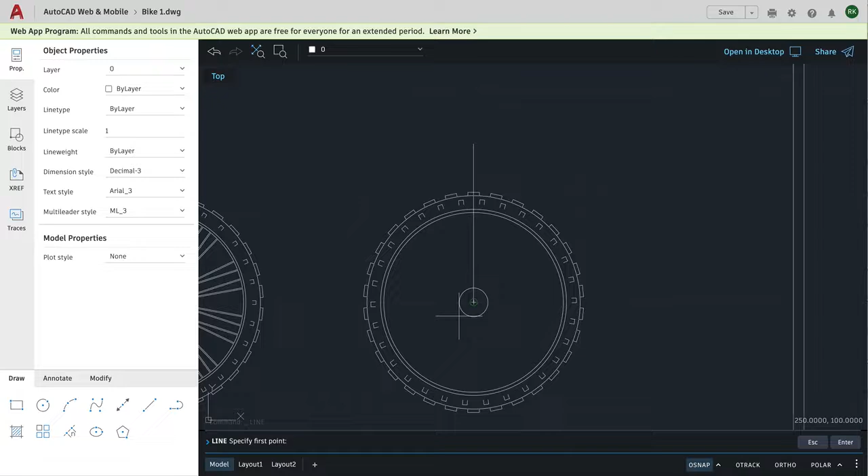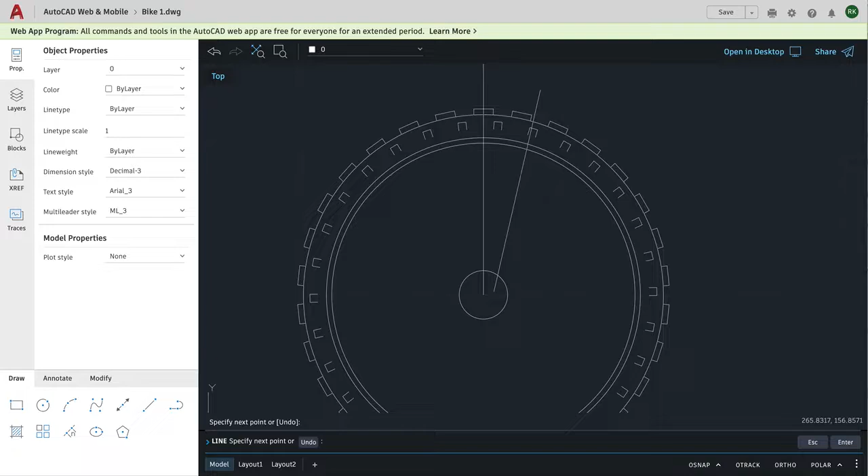So we're going to go down to our line tool, and I'm going to zoom in just a little bit. I'm going to draw one line, turn my object snap off. I'll draw a line from roughly here in the center up towards the top of the wheel on a bit of an angle. It doesn't really matter what angle you choose, maybe somewhere around there would work fine. So I'll draw my line right there and hit return to end that line.

I'm going to create another line that needs to be vertical, so I'll copy or offset this line that's already there. I'll choose Modify and Offset. It asks me what distance I want to offset through. I'll choose a distance of 2, return, then select my object and click on the right side. All right, so I now have those two lines created.

Now what I'm going to do is offset these lines and then mirror them to the other side so we have an exact mirror image. So I'll offset through a distance of 0.5, click on the line and offset to the left, and then offset again at the same distance, 0.5, select my object and offset this one to the right.

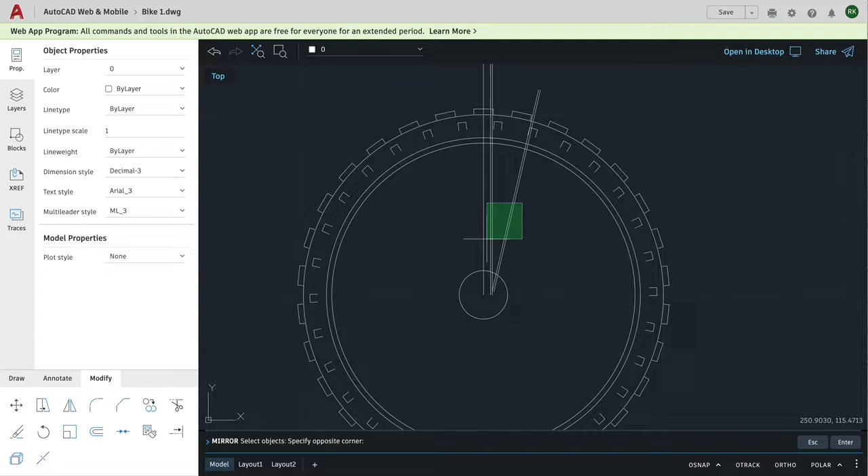Okay, so I have those two objects now. What I want to do with these is flip them over so I have a mirror copy on the other side. The tool that allows me to do that is called the mirror tool. So I select the mirror tool, and I want to select those 4 objects. I'm simply going to click and drag around so I'm covering the 4 of them, then hit return.

It says specify the first point of the mirror line. For this part, I need to turn my object snap back on. I'm going to click on the end of this line right in the center, and go all the way up to the top and click anywhere on that line that's exactly on it - any one of those intersection points would work just fine. So I click on that point and then hit return. That's going to give me, as you can see, a duplicate of those lines. So I now have that V pattern on both sides.

Now I'll zoom in a little bit more here so we can see this in more detail. I'm going to start to trim, so I'll turn my object snap off for the trim. I click on trim, hit enter on my keyboard, and I now simply click on all of the parts of these lines below that edge of the little circle. So I'm going to get rid of all of these - just keep clicking until they all disappear.

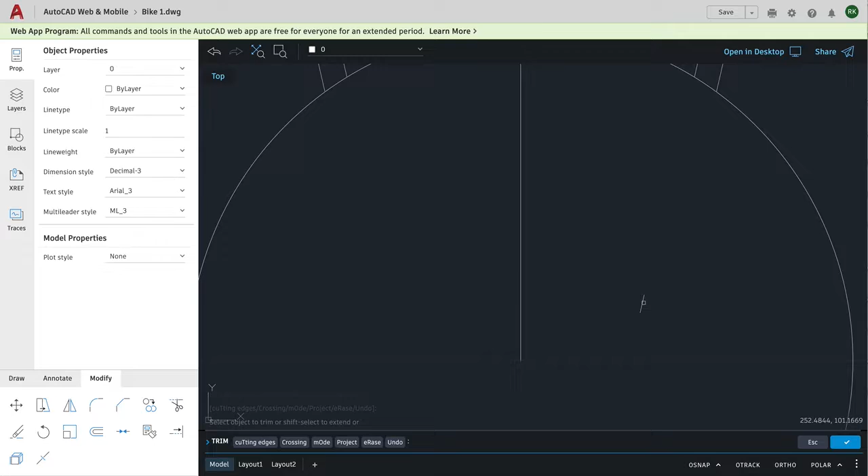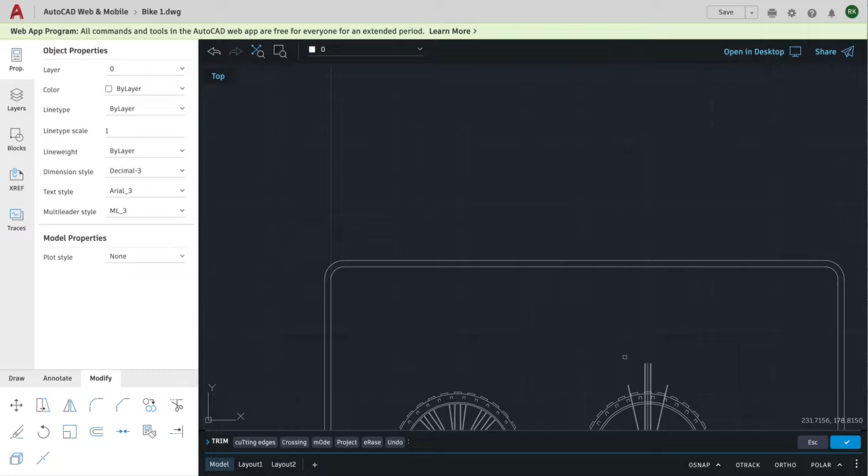I can ignore the middle one because I'm going to delete that whole line in just a second. Work my way right across, zoom in to get those little pieces at the end. Okay, and while I'm still doing this same trim, I'm going to scroll out and scroll back in at the top. Oh, I'm a little bit too far there - the joys of scrolling and zooming at the same time. Okay, I'll stop there and I'm going to trim everything above this line right here.

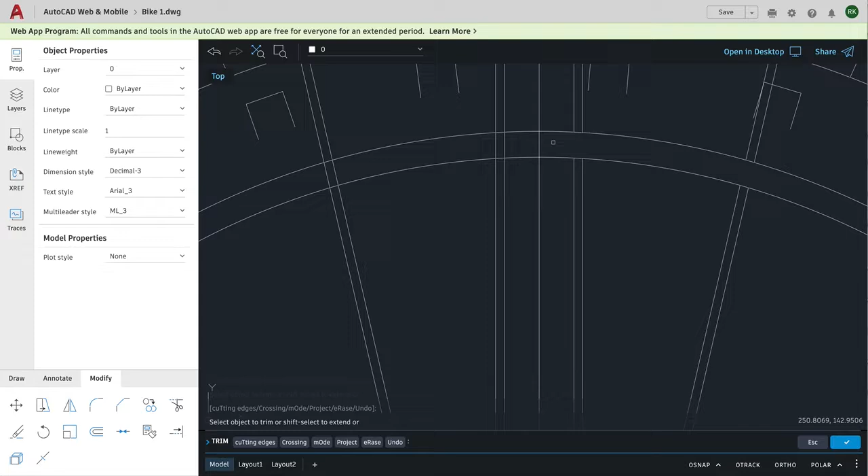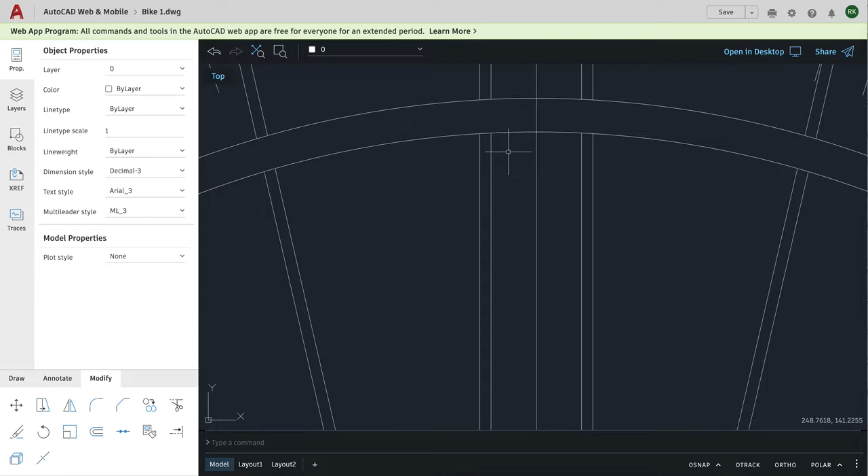Okay, so I'm just going to trim through that space there, end my trim. What I can do at that point is simply erase all of the lines that are sticking out above. I'll zoom out a bit so I can see all of them and erase those. To erase them, I'll simply select them and then hit delete.

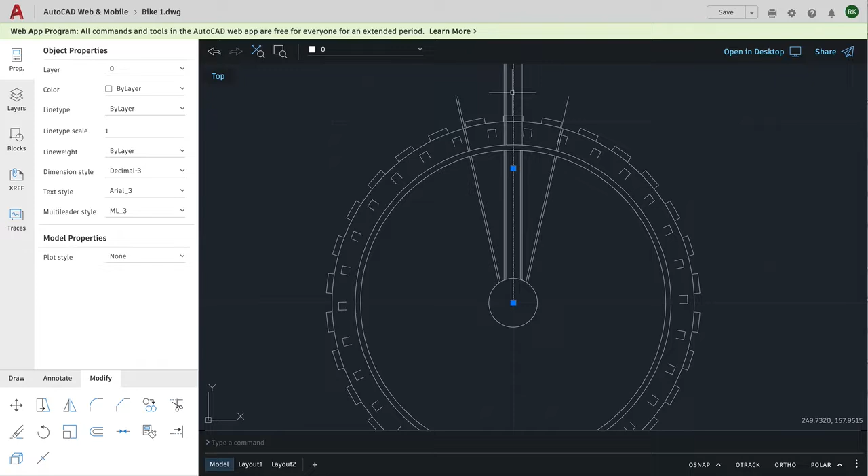Now, while we are working on these, we're going to draw all the portions or pieces of the bike separately, because if you're having internet connection issues, the more complex the drawing gets, the slower things are going to be. I can see my internet connection is slowing down here just a little bit already, even though my internet connection is pretty good. I think me drawing and trying to record me drawing at the same time is creating a little bit of an issue.

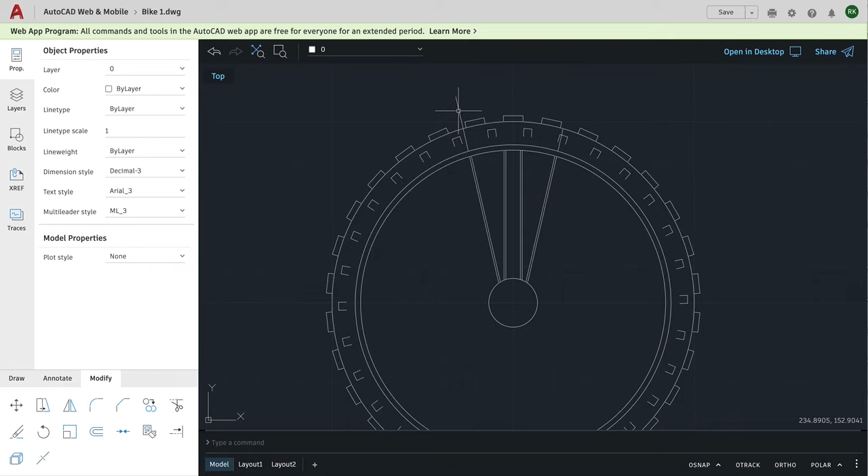But I'll just erase these quickly here, or as quickly as I can, and then we'll do our array for the spokes, and that'll be our wheel finished. There we go, one more line.

Okay, so now it's simply a matter of running my array one more time, and we're going to use essentially the same array settings we did before. So I'm going to come down to draw, sorry, I'm going to choose my array, and on my command line it asks me to select objects.

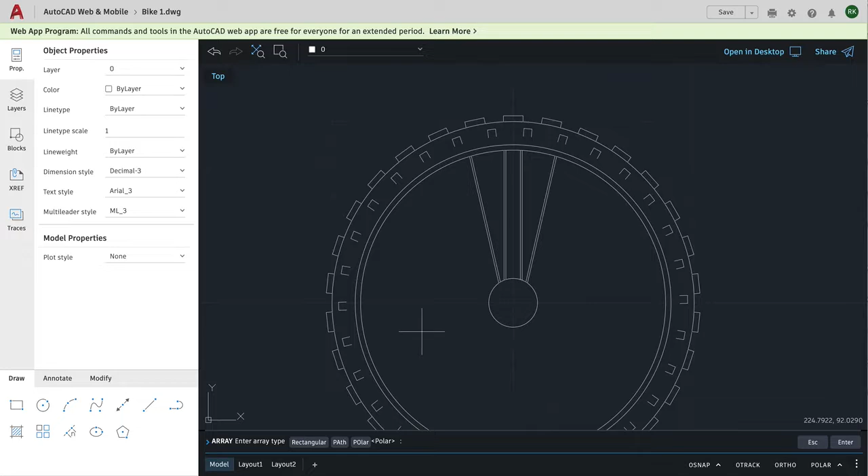So I will drag across my 4 spokes and hit return. Then I will select polar array. It's asking me to identify the center point.

So I'll turn my snap tools on and I'll find my center point. There it is. And now I want to tell it fill angle to make sure it's a full 360, which it is, left from the last one. And items, I'm going to ask for 10 items, so that grouping of 4 spokes will be repeated 10 times.

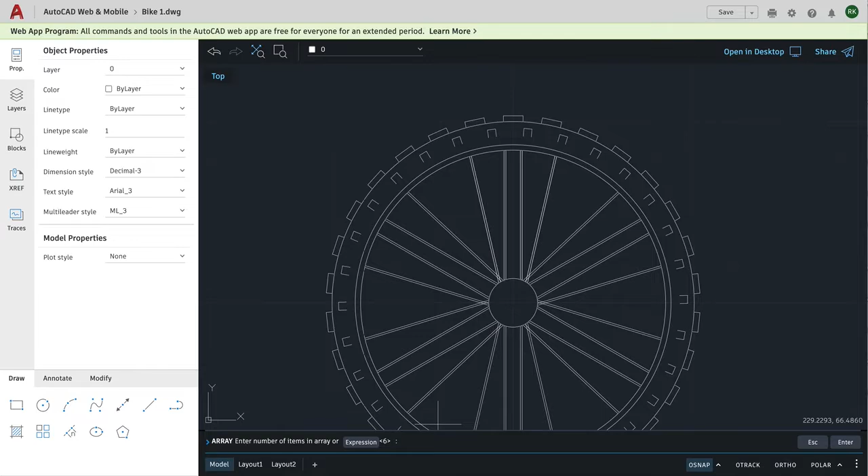There we go. Okay, so I'm pretty happy with that. It looks good. Now, if you do want to get really precise, you can zoom in on that, and you see all of the spokes that overlap.

If you want to go in and modify and choose trim, you can go ahead and start to erase the cross line where they overlap, because in all reality, only one of those would show, right?

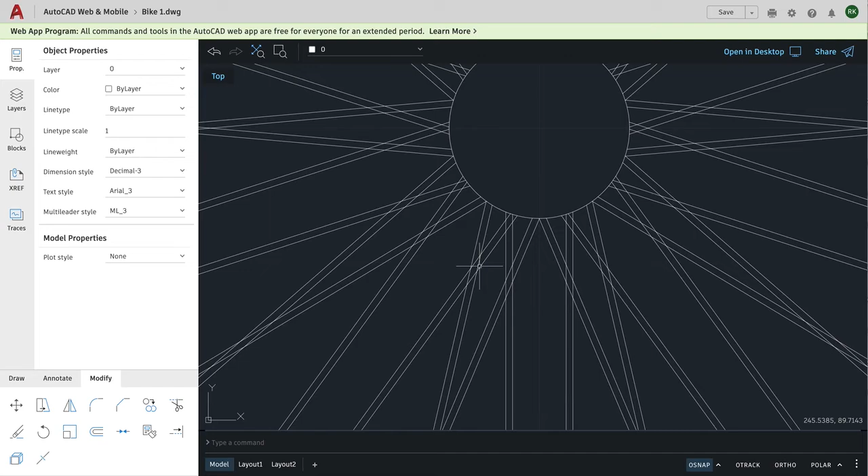Oh, mine's starting to bog down. It's not going to let me. That's unfortunate. I hope yours is working a little better than mine. And if it's not, like I said, there's options every day. You can choose to do the pencil and paper options, or you can choose to try some of these a little more exciting CAD options, but that's totally up to you.

So I'm going to go back to my Zoom Extents. Take a look at what I have right now. So I've got 2 wheels. I've done them both a little bit differently, but it doesn't really matter what your spoke pattern looks like as long as you have 4 spokes on the original and then you repeat from that.

This standard pattern that I did is common in a lot of bicycles. If you look at them, you'll see that grouping of 2 parallel, 2 angled, and then that repeats. So that's kind of true to life. Just random positions aren't going to work. So I put some pattern in it, and then we will change our title, and then we'll continue from there. All right, so there is finishing your wheels with a polar array.